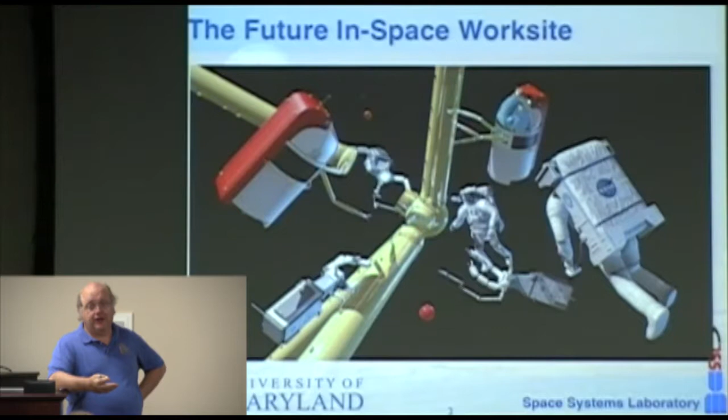One of the basic themes we're going to be hitting on time and again is humans and robots working together in space. That's true whether you're talking about it in microgravity or on the surface of the moon or on the surface of Mars. You're going to see robots on a lot of different scales working directly together with astronauts to keep them safe, to make them productive, and to try to get as much scientific return out of these very large investments as we possibly can.

The Space Systems Lab has been in existence for about 35 years. That's kind of scary, I never thought of that before. We started off at MIT and moved to the University of Maryland in 1990. The crown jewel is the neutral buoyancy facility, a couple hundred yards that way - a 50-foot diameter, 25-foot deep water tank that we use to simulate microgravity. We're the only university in the world that has a neutral buoyancy facility, so I like to point that out as many times as I can.

The SSL does work in 5 different areas: human systems - this is primarily human spaceflight, humans in the space environment - dexterous robotics, flight programs, systems design, and human-robot interaction. I'm really going to talk about 3 of these today, primarily dexterous robots and human-robot interaction, and some recent developments in flight programs with our robotic systems.

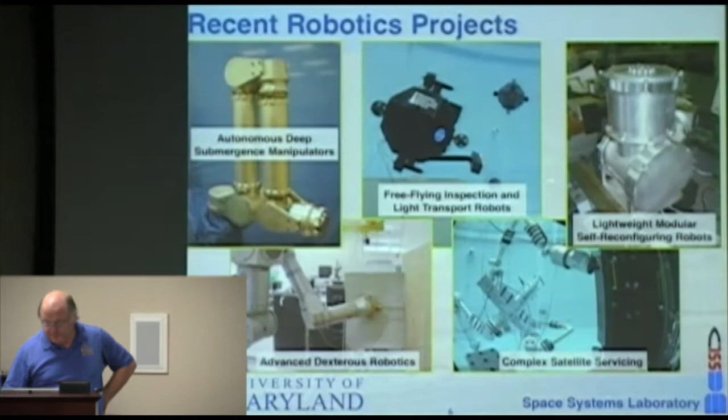Probably the simplest system in our lab is SCAMP, which is Space Camera and Mobility Platform. It's basically a free-flying camera platform with cameras, surprisingly enough. As in all of our free-flying hardware, we go to a great deal of effort to make sure the center of mass is coincident with the center of buoyancy, so it has no preferred orientation. We're not building submarines, we're building spacecraft. We want them to behave like spacecraft.

These SCAMP units, we have 2 of them, so we can do formation flying. We use them routinely to monitor activities in the tank. This is some work that we have done on autonomous vision-based flight control, where we're basically cueing off of a color-coded sphere and maintaining varied distance and separation from the sphere based on visual inputs.

And human-robot interaction, which is a recurring theme. In this case, it's holding a tool board for the person who is standing in for an astronaut doing a particular servicing task.

We had 2 programs quite recently that we hope will actually result in hardware developed in-house here at the University of Maryland and flown in space. Exo-SPHERES is a recent award from a combination of NASA and DARPA.

This vehicle is roughly half a meter on the side and about 50 kilograms total mass. It uses a phase change cold gas system for propulsion and has stereo cameras, so we plan to do vision guided autonomous flight control. The idea is this would emerge from the Kibo airlock in the Japanese segment of International Space Station and do inspection tasks outside.

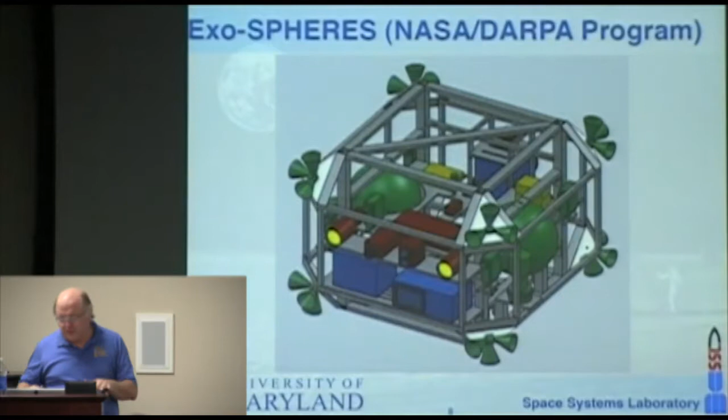The idea behind it is that we're outfitting this with a standardized interface, both mechanically and electrically, for mission payload hardware. One of the things we are looking at right now in my senior capstone design class is a human mission to an asteroid. They're actually baselining a unit like this with different scientific instruments that you could put in and go out and survey the asteroid before the humans go out and do the critical sampling technologies.

Another flight program we got quite recently is DYMAFLEX. This is part of the U.S. Air Force University Nanosat program. The idea we proposed was to build a small satellite, again about half a meter on the side, roughly 50 kilograms, and it would have a manipulator on board.

The manipulator is a substantial fraction of the mass of the vehicle, and it is not your typical move-at-the-speed-of-an-hour-hand space manipulator. This is a typical manipulator that moves at the sort of speed you would see on the factory floor, and it's going to cause some pretty tremendous cross-coupling to the vehicle dynamics.

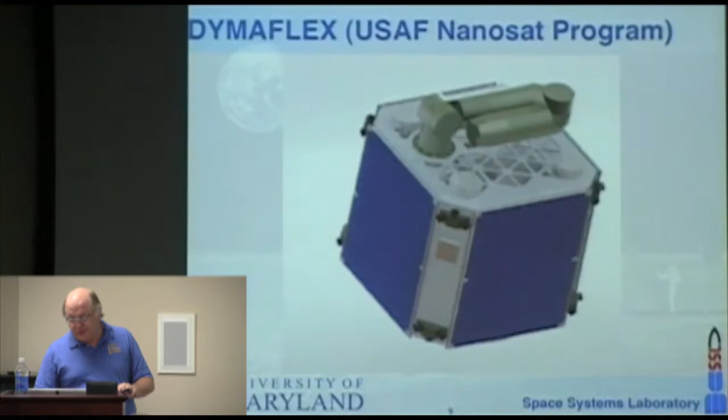We're actually flying this as a flight experiment to understand how you would mitigate the perturbing effects of the manipulator reaction forces on attitude control for the spacecraft. So this will be something we'll build up a prototype in the next 2 years, and then if we're down selected, take it to flight on an Air Force secondary launch.

Sort of the flagship of the fleet in the Space Systems Lab is Ranger. This was a project that started in 1992 as an attempt to - I won't go through the long and incredibly tragic history of dexterous robotics in the space program - but in the early 90s, we basically come out of an experience with a program called Flight Telerobotic Servicer by NASA.

Flight Telerobotic Servicer had cost escalation on the order of 600% and was closing in on $1 billion for total program cost by the time it was canceled, which left the attitude around NASA, which still persists to this day at some level, that space robots cost $1 billion and take 20 years to develop.

So we wanted to demonstrate that wasn't true. We proposed a very low cost, $20 million program to build and fly dexterous robots, originally on a free-flying vehicle, and then after some difficulties with that, we redesigned it to fly on the space shuttle.

So this is our robotic servicing system. 2 eight-degree-of-freedom dexterous arms. These arms are faster and stronger and more precise than the human arm. They are intended to be human scale.

We wanted the robot to be able to enter restricted volumes that astronauts in spacesuits can enter and do the same tasks. Our goal in designing this was a robot that could do anything an astronaut in a spacesuit could do. We didn't want to try to build an artificial human.

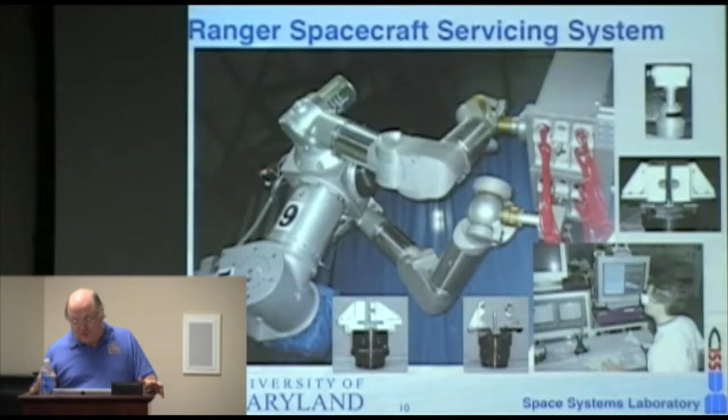So they went to Canada, who builds the special purpose dexterous manipulator, known as SPDM — they call it Dexter. They arranged for that to be developed for flight, but the Canadian manipulator system is incapable of moving on the ground. Basically, you either do computer graphics or you don't test it at all until you get to orbit. And they came to us and said, could you modify your Ranger system to replicate the kinematics of the SPDM and do independent validation and verification of the tools and the tasks and the viewpoints — all the things we need to verify before we fly.

So I went through and said, okay, I've got to triple the length of these arms, double the length of the positioning leg, build a body that basically violates everything we've ever learned about robotic servicing, replicating this SPDM body, and come up with new end effectors to replace our interchangeable end effectors. The Canadian end effectors are roughly the size, shape, and dexterity of a trash can. I'm being snotty, but it's true.

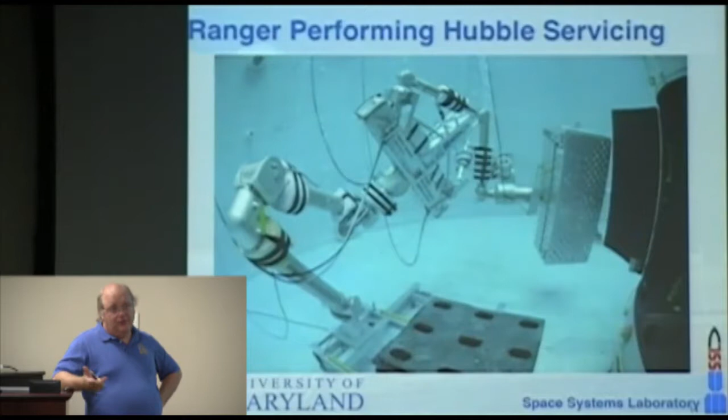Anyway, it turns out we said, sure, we'll do it. We designed these Ranger arms to be very highly modular — one bolt can disassemble a module. The module has all the electronics located in it that controls the module, and electrical connections are automatically made when the module's mated. We've actually had one robot arm disassemble the other robot arm — it's not good enough to put it back together yet. The length of time we were down to do all that stuff I listed was 8 hours, and we were back in the water going again. Obviously it took us a lot longer to build the pieces, but once we had the pieces, we could put it together and go.

This is an axial instrument. This is the Hubble Space Telescope mock-up that the astronauts use to train on, roughly the size of a telephone booth. To insert this, the near edge and the far edge at the top each have to be aligned within 50 thousandths of an inch, and we did that routinely with the robot. In fact, in the 4 months the program was in existence, we demonstrated every task that the astronauts had been planning to do on the SM-4 mission.

And at the end of 4 months, when things were going great, Sean O'Keefe stepped down as NASA administrator. Mike Griffin was appointed as NASA administrator, and one of his first acts was to say, there's no way robots can service the Hubble Space Telescope — I'm canceling this program, and we're going to fly the shuttle there again. So they very successfully serviced it with humans again a year or so ago. And for those 4 months, we were doing really good.

We try to do a lot with teaming. These are the same Ranger arms. This is a really cool facility, if you ever get a chance to see it, down at the Naval Research Labs in southwestern DC.

You're inside a large warehouse with 60, 70 foot ceilings, the entire thing painted black. This is a large Fanuc arm with a payload capability of 1,000 pounds or so, on a 2 degree of freedom XY plotter. There's another Fanuc arm on another 2 DOF Cartesian motion base at a higher level. The base of this robot is 15 feet off the ground, and the base of this one is 40 feet off the ground. You can do relative maneuvering, so you have 6 or more, actually 8 degrees of freedom to the interface.

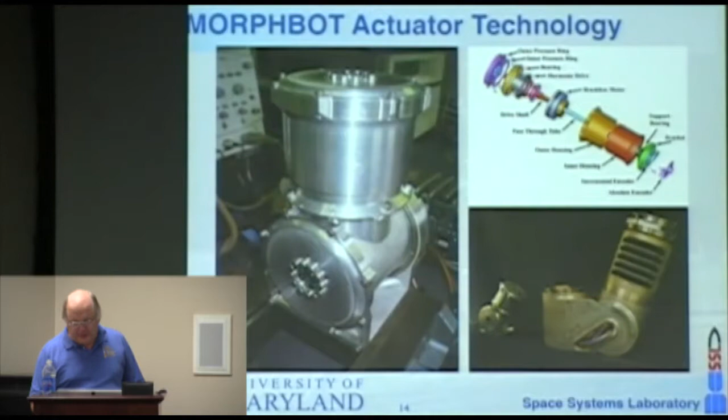Coupled with our modular philosophy, we pushed hard on modularity. We came up with the idea of creating, as an outgrowth of the interchangeable end effector mechanism we use on Ranger, an androgynous interface mechanism so we can plug anything in any orientation. Then we can combine single or double actuators, structural links of different sizes, different end effectors, and different sensor nodes like force torque sensors and cameras. We also have nodes that just do interconnects, carry power, or carry specialized systems like a propulsion system for free flight capability, so you can put them together however you want.

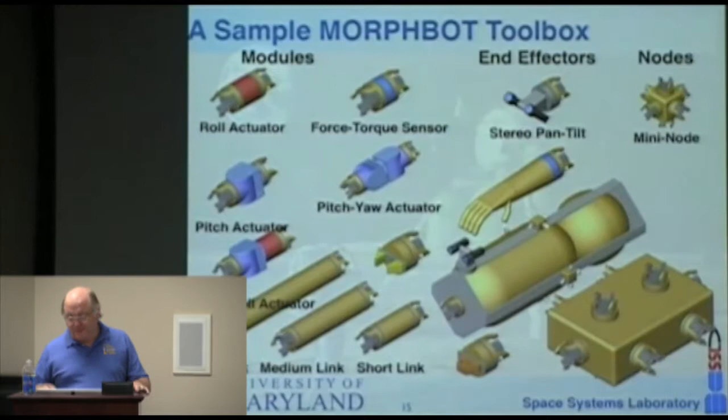This, for example, is a configuration we optimized for doing a radial instrument replacement on the Hubble Space Telescope. These manipulators react forces through EVA handrails, and as long as we have three, we have a very rigid connection of the system. This larger arm with two dexterous end effectors gives us the capability to do all the EVA tasks required to release these instruments, with enough stroke to pull them straight 8 feet out of the telescope for extraction, and then do the opposite for insertion.

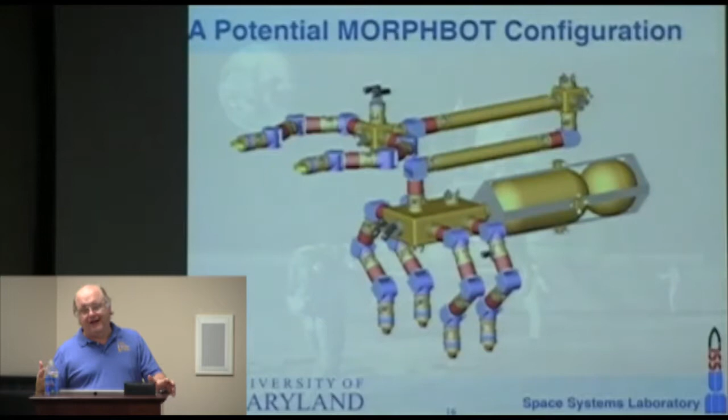So we think the idea in the future is you shouldn't actually fly a robot. You're going to fly a robot toolkit, and then have the smarts to let the robot reconfigure itself to ideally fit whatever task you need to do.

Since I'm talking about robotic systems, let me mention Samurai. This was a program we started with NASA for sample collection in the deep sea. You ask, well, why is NASA interested in sample collection? The program is called ASTEP, Astrobiology Science and Technology for Exploring the Planets, and the idea was to develop technology useful for looking for life in the solar system, then demonstrate it by doing cutting-edge science on Earth. So we teamed up with Woods Hole.

At the time, no vehicle had ever been to the bottom of the Arctic Ocean. You can't send a tethered vehicle down because the ice pack will shift and cut your tether. So you go into the Arctic ice pack on an icebreaker, cut a hole, and drop an autonomous underwater vehicle through it. It goes down to the bottom, surveys it, comes back up, and has to surface in the same hole it went down through. Then you can pick it up 36 hours later.

So that wasn't nearly ambitious enough. Our theory was that in 2003, a German expedition had discovered evidence in the water column that there are hydrothermal vents on the bottom of the Arctic Ocean. You've seen pictures of black smokers in the Pacific and Atlantic, with colonies of chemosynthetic life forms around them that have no reliance on the sun whatsoever for energy.

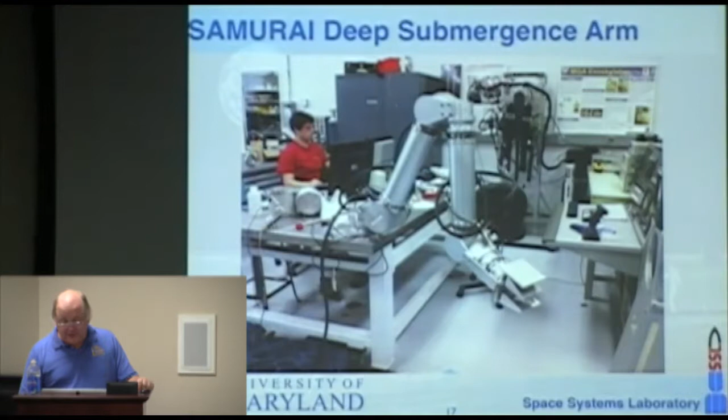Human system projects—I'm not going to talk a lot about this because you folks are interested in robots. We're interested in humans and robots together. We actually design and build our own spacesuits, because if we want to do human EVA activity these days, that's the only way to do it. You can't get access to NASA equipment anymore. We do a lot of biomechanics instrumentation, which ties into robotics, as I'll show you in a bit.

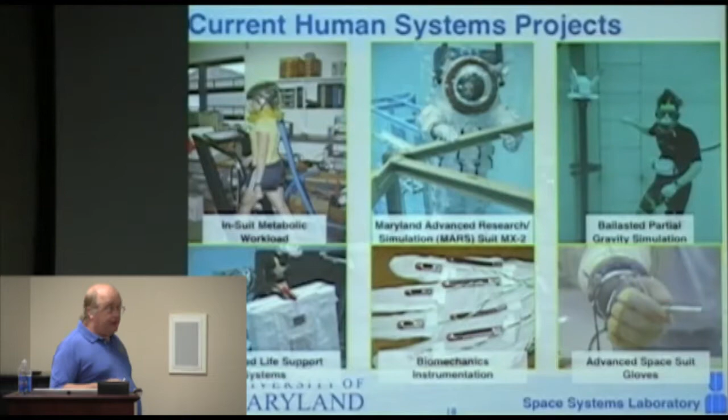This is our MX2 suit. We've built four different suits so far, and we're working on the next generation of both lines of suits that we're doing now. This is a full pressure suit, by the way—it basically functions the same way any spacesuit does in space, although it's optimized for the underwater environment. What we use it for is human-robot interactions. We're really interested in how humans and robots interact, not just how a human commands a robot, but how a human and a robot can work together in a single work cycle.

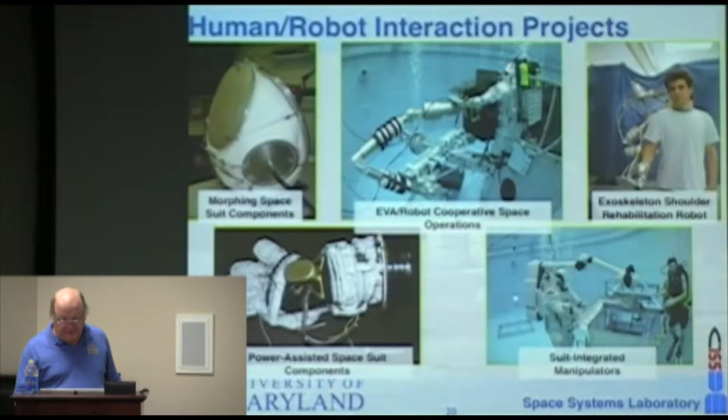So these are the things we'll... excuse me, I'm getting over some kind of upper respiratory infection. It still comes back to bite me occasionally.

You saw the robot before. We've been very interested in how robots can help humans do... use it up here later... how robots can help humans do servicing tasks.

The big black box in front of the person in the suit is a battery pack for the Hubble Space Telescope. It weighs about 450 pounds. Obviously, in space or in the water, it's neutral—it doesn't weigh anything, but it's massive. So rather than have the human have to carry that, we have the robot providing restraint for the human in terms of the foot restraints they're standing in. One robot arm is bringing the replacement battery pack to be bolted into the inside of this door. The other robot has opened the door and is holding it open, monitoring the human with cameras looking over the top of the door.

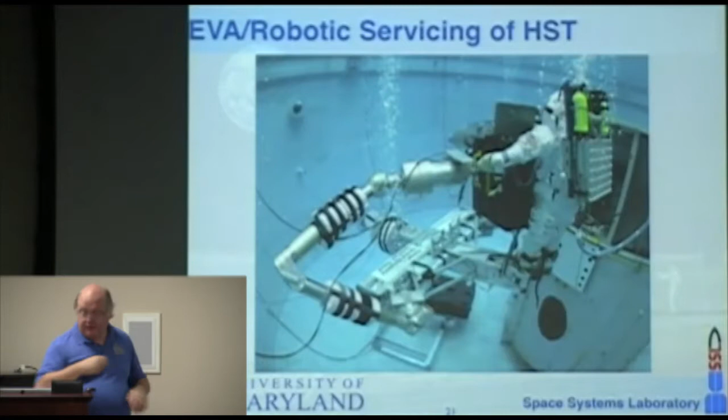We have shown with this kind of interaction—well, here's actually the chart. We took the data we had and looked at NASA trends in robot servicing. This was the first servicing mission to Hubble; we have the data for all the others. This is illustrative.

On average, when the astronauts actually went up and did this servicing, they stayed outside each day for 6 hours and 15 minutes—that's the dotted red line. So we then divided the tasks the astronauts did into tasks best done by astronauts and tasks best done by robots. We further subdivided the robot tasks into ones the robots should do before the astronauts get there, as preparation; tasks the robots need to do to support the astronauts while they're there; or tasks the robot can do after the astronauts have gone back into the airlock and are eating dinner and sleeping—think of it as cleaning up.

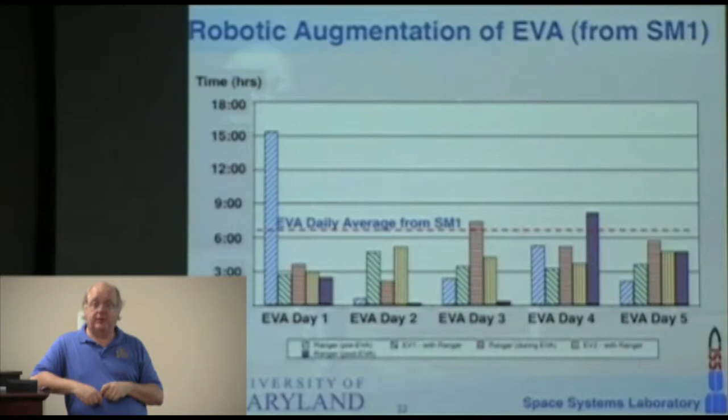So that's the left, center, and right bars—the green and yellow are the astronaut types. When we went through all of the activities, we realized the robotic system could save half of the astronauts' time. That was true on this one and on things like SM-3B and SM-4, the servicing missions with a lot of delicate things that weren't really planned in the design phase to be done by astronauts, needing a lot of dexterity—we could save half the astronauts' time. If you look at EVAs that were more like plug-and-play box replacement, we could save 80% of the astronaut time. We thought that really shows the capabilities of these systems to help astronauts out.

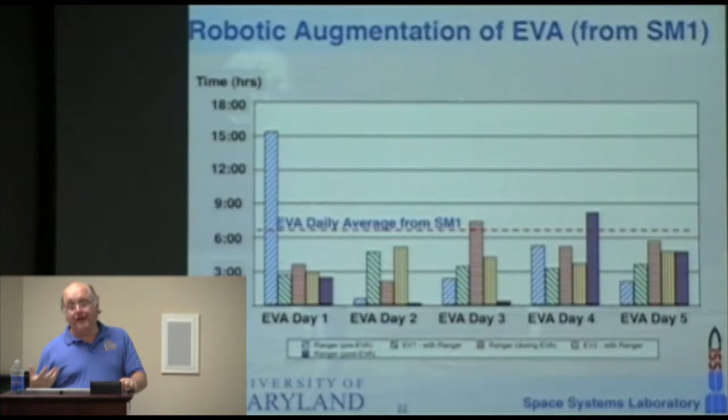So if having a robotic system the astronaut works with helps, what if you move the robotics closer to the astronaut? What if you actually put additional robotic manipulators on the astronaut's backpack—an extra set of arms? This has been known to my graduate students as the Doc Ock suit, for Spider-Man fans. So the concept here is that maybe combining robotic capabilities into the suit would be beneficial.

How do you get data bandwidth to and from the human? You're in a suit, very large and bulky, sort of like a 2-year-old bundled up to go outside in the snow. We've got very little capability, but we wanted to get a lot of information to the astronaut and be able to command things.

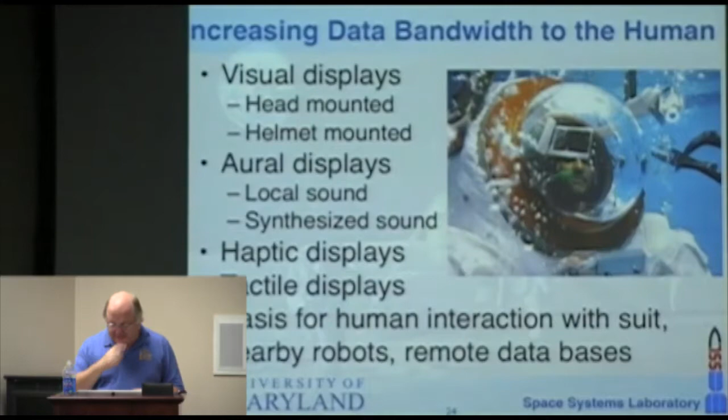This is a very recent test. We were doing tests in the Arizona desert with our teamed university, Arizona State, looking at robotics supporting astronauts in geology tasks on the moon or Mars. One thing: if you're on the moon, you have 14 Earth days of nighttime. If you're there for a long period, we didn't think it was credible that you'd just sit there and twiddle your thumbs for 14 days until the sun came back.

So we actually did some night traverses in the Arizona desert. This is Kelsey Young, a geology grad student at Arizona State, in one of our suits, and we were looking at lighting for geological exploration. She also has a control panel, which you can see better in the picture, where she can interact with the computer in the backpack, interact with the rover she's walking with, issue commands, and so forth. We're looking at how all that works.

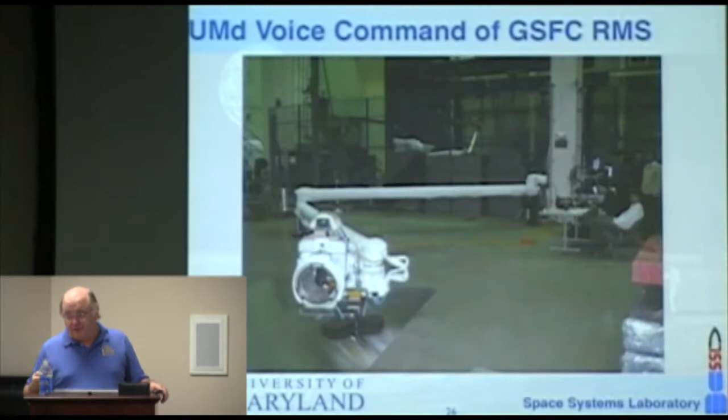We're really interested in the long run of how to move a lot of robotic capabilities into the spacesuit. This is one of the first instances of that.

Classic spacesuits do not have metacarpophalangeal joints, which means if you put your hand in a spacesuit glove and try to close it the way you normally do, it doesn't bend along your knuckles. There's no joint there because it's a large joint with too much friction for a person to use. So you grasp by bending at the proximal interphalangeals.

If you ever walk around Johnson Space Center, you can always tell which astronauts are going to go on an EVA on an upcoming mission, because literally for a year, everywhere they go, they carry tennis balls and squeeze them, trying to build up these muscles, because that's not the way your hands are used to grasping.

So we worked with ILC Dover, who makes all the spacesuits, and they made us a shuttle glove that does have an MCP joint. As predicted, it's very difficult to move - it takes 16 pounds of force. So if you try to do this manually, you get really fatigued.

So we developed a robotic actuator that actuates the MCP joint, with an adaptive nonlinear controller - this was Rob Sanner in the Aero Department who did that. It basically allows the glove to stay out of your way: if you move your hand, it's sensed by the glove and it actuates that joint for you. This took the required hand force to move that joint from 16 pounds down to a maximum of 12 ounces, giving you a degree of freedom in the glove you never had before. We think that was a pretty cool demonstration of capability.

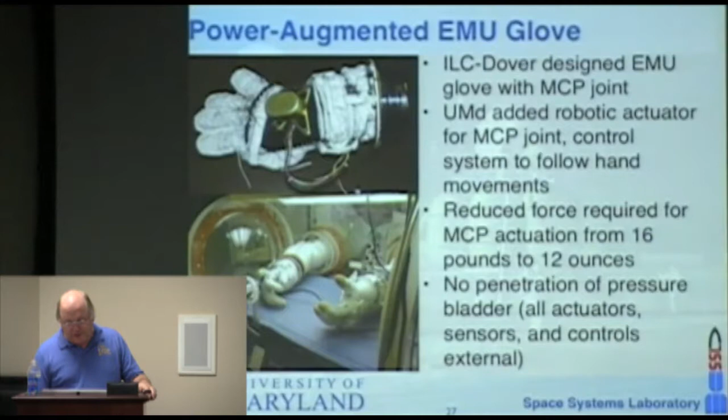So our next goal is to go to the torso.

Without going into a primer on spacesuit design, torsos with a neck ring, shoulder rings, and waist are difficult to design, build, and use. Your shoulders have articulation at the clavicle and scapula, so raising your hands isn't just bending at the shoulder joint, the joints move relative to your vertebrae. Having a fixed shoulder joint, which most suits require, is very constraining. In recent years, a number of astronauts have needed surgical reconstruction of the rotator cuff because of constriction from the shoulder bearings.

The helmet bearing, the helmet ring, you wouldn't think of as a problem since you don't articulate it. But if you're walking on a planet's surface, you need to see your feet, and as the suit balloons out, you need a way to pull the helmet ring down so you can see them. And if I want to reach down, I need to bend at the waist. If you've seen films of Apollo astronauts, they can't bend at the waist, so they use long handles or tools, or if they need to pick something up, they just fall over, pick it up, and get back up.

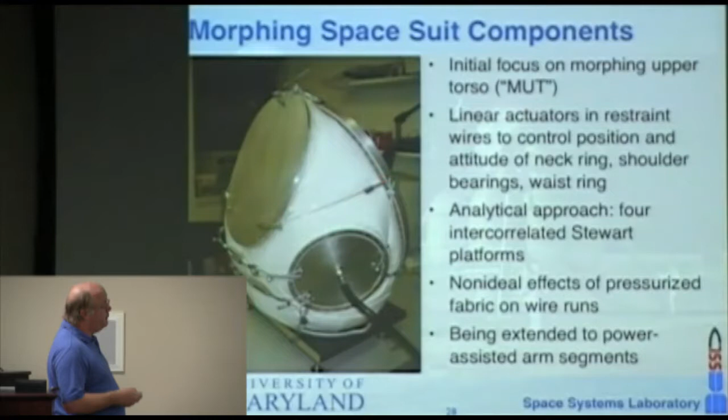So we came up with the concept of the morphing upper torso, or MUT. This is an early picture, it just has restraint lines. The idea is to put linear actuators in here. As a rear-entry suit, there's a ring on your back which is the door you use to get in and out, and we have parallel linkages to the helmet ring, the two shoulder bearings, and the waist ring. Each of these effectively forms a Stewart platform, a parallel manipulator.

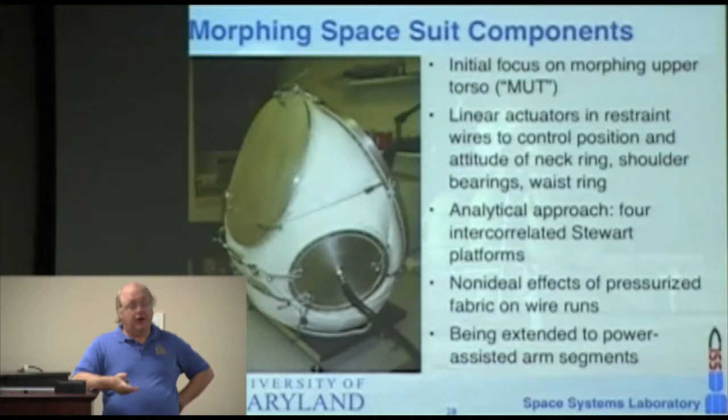But the links don't run strictly to the ground plane, which would be the entry hatch, they run to each other. So it's four intercorrelated Stewart platforms that all have to be controlled together. Shane Jacobs got his PhD a year or so ago on the underlying theory of how to make four intercorrelated Stewart platforms work together. This allows us, if you think about getting into a spacesuit, you want it big when you get in, but exactly fitting you when you're operating it, we can do that. If you want to bend over, you want the suit to stay out of your way, we can do that too.

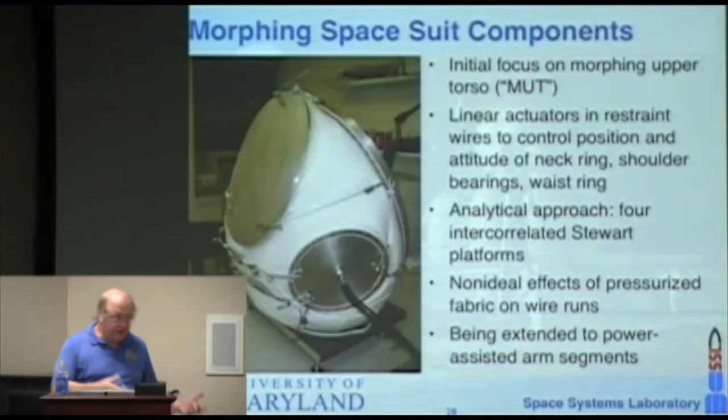An extension of this work involves shoulder articulation. A lot of people coming back from Iraq and Afghanistan have severe shoulder trauma from IEDs, from explosive devices, while standing up to peek over the armor. They start off with no shoulder strength whatsoever, and they can't do classic rehabilitation because that's resistive, and if you have no strength you can't do it. What they actually have to do now is have a physical therapist hold their arm and move it through all possible combinations, time and time again, four to six hours a day for weeks, to retrain the nervous system on what the signals are like as the arm moves.

Then as they start to recover and build muscle, you can go into resistance training. This is an exoskeletal system you wear, with three degrees of freedom at the shoulder, but also degrees of freedom to track your shoulder motion as it articulates on the rest of your skeletal system. It's strong enough to go through that patterning phase, moving the human's arm around, and then go into resistance mode. We're now working with medical people on this, we did it for Georgetown Medical School, and we're looking at applications like stroke rehabilitation, where people have lost muscle control and need to retrain themselves. We actually think of this as an extension of a completely powered spacesuit, so it makes us happy too.

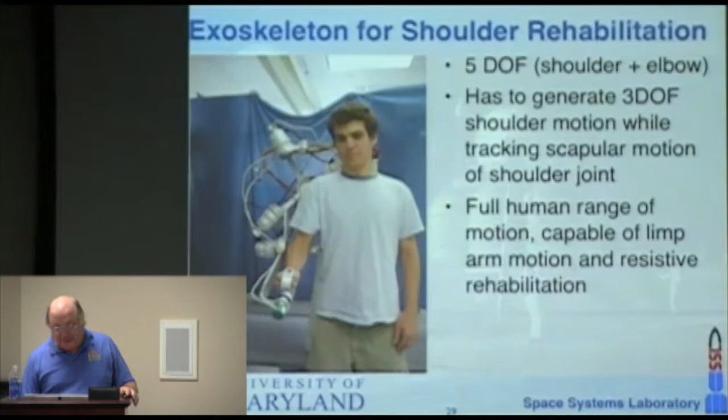The last couple of years we've been teaming with Arizona State because they are space scientists. One of the things I'd like to do for our students in aerospace engineering is have them do interdisciplinary work, designing engineering hardware in response to the specifications and requirements of the science types. I hoped it would also be educational for the science students, to figure out how frustrated they're going to be when they graduate and have to deal with engineers.

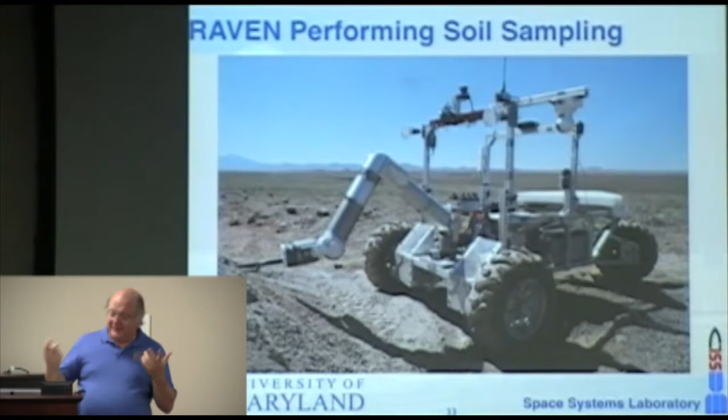This is our trip in March. One of the things we did was take time to look at different ways to control the robot. Kelsey is wearing a glove we developed in the lab that has three different accelerometers and bend sensors on the fingers. In this particular case, we're using wrist roll and hand grasp to command turning and speed of the rover. We actually have enough capability in this to do full arm pose.

One of the things we use downstream is master-slave teleoperation of the manipulator, where you go through the digging motion and the arm will go through the digging motion with you. I just like this picture.

This rover - again, we tend to build things that address one of the big problems NASA had. They did tests in 1999 and 2000 called ASRO, Astronaut Support Rover, and concluded rovers are useless. If you look at why they said that, it was because the rover traveled so slowly the astronauts just walked away from it - couldn't keep up. So we made sure Raven was a robot that could keep up.

This is where we spend our time, the Neutral Buoyancy facility I talked about before. We have a lab in the Kim building, off the wing that nobody ever goes to. We've got our Advanced Robotics Development Lab, set up to build and deliver flight hardware - it can be certified Class 100,000 clean. We have a thermal chamber and a thermal vacuum chamber in here. Off of that are two little back rooms, an electronics lab, and receiving, inspection, and secure storage, which is required for flight hardware.

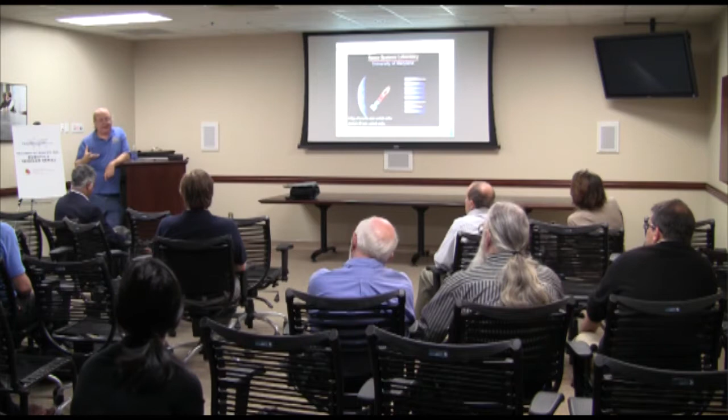Most of the manipulators, when they operate, are controlled in the task. Yes, all of the manipulators are typically controlled in end effector coordinates in resolved rate mode. Actually, Ranger has a number of different coordinate frames you can specify, so that when you change end effectors, there's actually a new data set loaded so that you're in the tip frame of the end effector regardless of the end effector. So if you come up with a longer end effector, you're in that tip frame. We also can go in base frame, and we can also specify a task frame and operate in task frame.

So basically the manipulator that you're teleoperating and the person moving it - are they different manipulators? You're probably using a joystick device to teleoperate a complex manipulator.

We've looked at a lot of different devices, but the everyday version is 2 3-degree-of-freedom hand controllers. One controls the rotation rates of the tool point, and the other controls the translation rates of the tool point. And the constraints on the slave manipulator, if there's some joint limits and stuff like that - are those automatically maintained?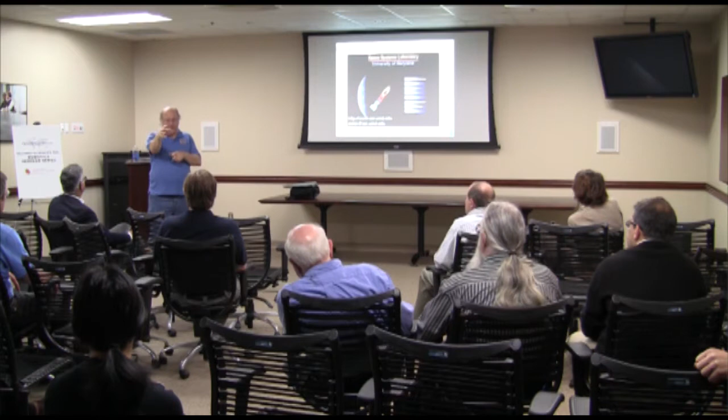Yeah, actually it's quite interesting because these manipulators are all redundant manipulators, 7 and 8 degrees of freedom. And so our control algorithm - usually you can change it, but the typical operating mode is to take the 7th degree of freedom and use that to control the shoulder, elbow, wrist plane angle. So you can hold a tip position and do that. And so we drive the SEW angle to maximize distance to the nearest singularity. So as you go through a maneuver, you actually see the arm doing some really weird motions and the wrist reconfiguring itself, which we know what it's doing, and it's good. It keeps us away from singularities. It makes it easier to use the arms.

The funny thing is we had some astronauts running the arms, and the first time it went through one of these reconfigurations, the guy said, 'It's broken.' I said, 'No, it's what it's supposed to do.' They have this mindset that nothing moves unless I tell it to move, so they really did not like this moment. I said, 'Okay, I'll turn it off. If you want to change that angle, flip that little thumb controller on your joystick and you can change the angle manually. But you've got to keep it out of the singularity now because it's not doing it for you anymore.'

We've learned a lot, particularly with the Ranger arms that are 8 degrees of freedom, plus 2 more degrees of freedom in the end effector. You wouldn't think it, but we find there's one set of controls where it's an 8 degree of freedom arm with a 2 degree of freedom manipulator, and then we can mode switch to make a 7 degree of freedom manipulator with 3 degrees of freedom on the end effector. It really makes a difference—some tasks work better one way, and some work better the other way.

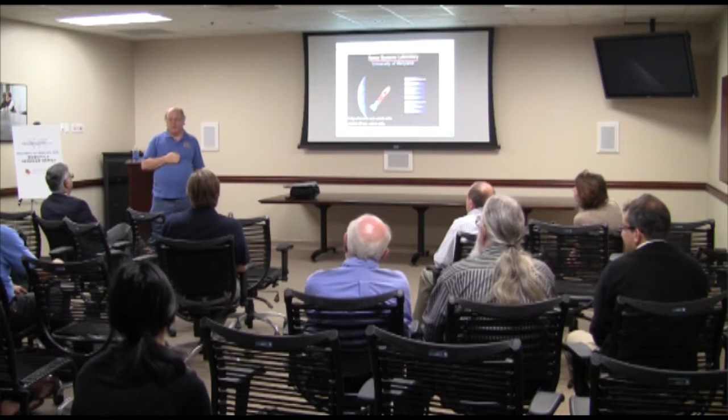What's it like with corrosion? I know a little bit about underwater, how you have to build something so it doesn't rust the next day after you pull it out. But what about vacuum? For instance, if you take a cheap transistor radio, slowly let the air equalize, then bring it back in—is it going to work? Is the level of worry similar to rust and water being so corrosive?

Paperwork aside, I will tell you it is much harder designing an underwater robot than a space robot. We built the Ranger arms as underwater robots—the flight arms were identical except we left out the seals, because we wanted them to go to vacuum. The electronics work fine in vacuum. We designed the arms so the thermal paths were correct, so the arm wouldn't overheat. If you compare a space flight manipulator to a 6,000 meter deep submergence manipulator, there's orders of magnitude difference in complication—much easier to build a flight manipulator. Now, I did say paperwork aside, because you need basically 10 times the mass of the arm in paperwork to get a flight system.